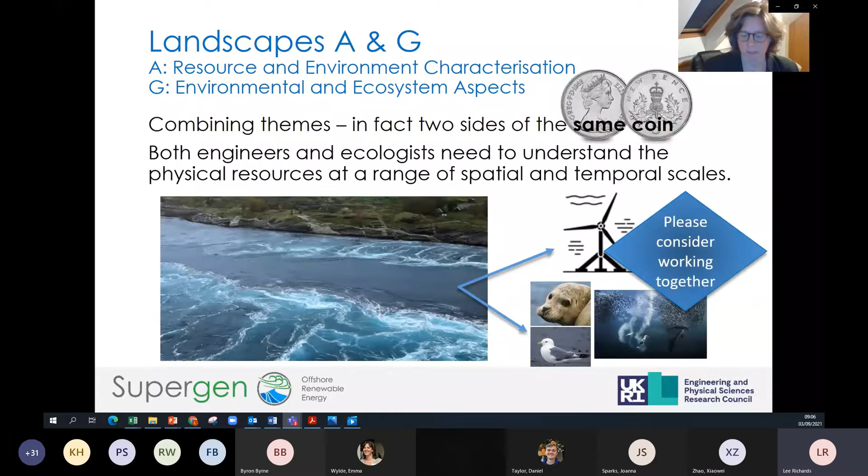What we're doing in our core work within Supergen is looking at the fine scale to the large scale physical and ecosystem aspects. This work goes throughout work packages 1 to 5.

An example of some of the information we've collected and are using is 3D hydrodynamic models - you can see one running in the background in this location - but also ADCP and acoustic fish school collection from the MeyGen tidal site that we're using. That's at the fine scale.

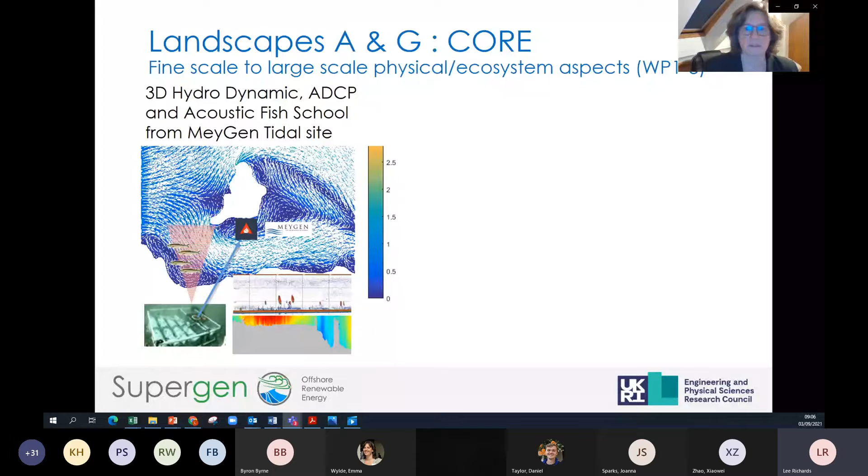At the large scale, we're looking at whole information on UK waters for offshore wind. This is an image of all of the Round 4 sites in which offshore wind will be placed. So there's a lot of habitat there to understand and look at - what are the best locations, and within micrositing for pylons and anchors, and of course the use of cables.

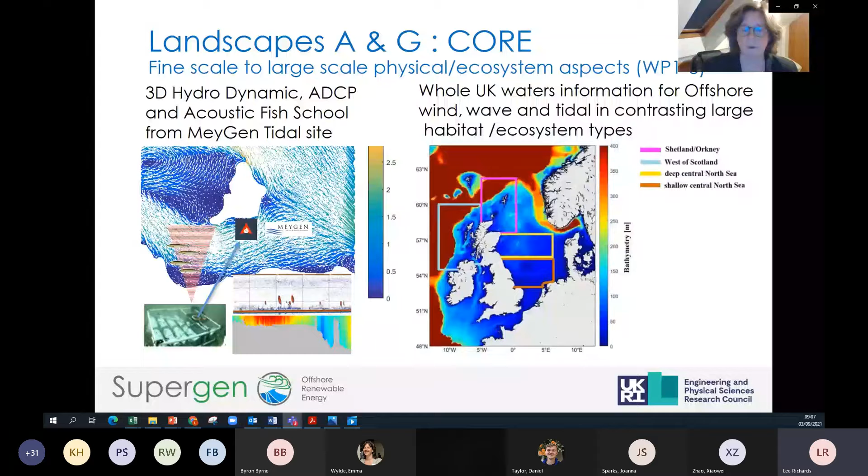We've also looked at these habitats in terms of wave and tidal energy by looking at contrasting habitats and digging into the ecosystem types in these areas. We've done that using 30 years of historical data to start to understand the ecosystem types and also understand what climate change has been doing in these different regions, to better predict which regions might be changing much more drastically than others.

Now what I'm going to do is go through a range of our flexi funds in these landscapes.

I'm going to start with the work looking at current on wave buoys. This has been done by Samuel Draycott using tank simulations and real experiments, where he can compare the measured motion of the amplitudes in these experiments to the predictions from a numerical model that includes currents. This is providing a new framework for predicting current and directional spectra from buoy motions.

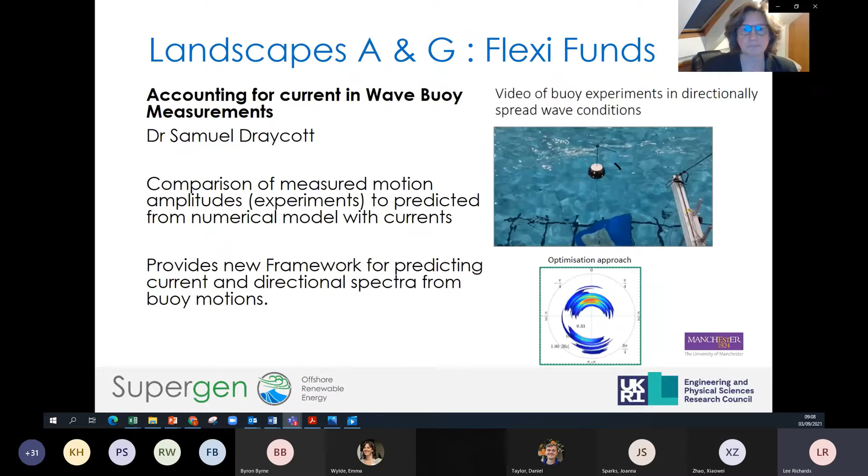Next, I'm going to talk about the V-Scores project. This is run by Benjamin Williamson, using drones as a very cost-effective, low-risk, rapid measurement technique. What you can do with this is use the images you can collect very rapidly from the drones to validate surface currents and use it as a mapping tool.

Drones can be compared to data from ADCPs, ADVs, and drifters, but done much more rapidly and much more inexpensively. Also, you can translate that information from the surface you see to predict what's going on through the water column. This sort of information can be used in the environmental aspects as well, to predict things like seabirds and mammal movement in these areas.

Another one called Venti, run by Marco Placidi, is looking at the fact that the atmosphere is often in non-neutral thermal conditions. As you go up through the atmosphere, the wind resource is significantly different and it's really affected by this, but it's often neglected in many models. So they are using the meteorological wind tunnel, producing these outcomes of non-neutral winds, and putting that back in to study their effect on wind farm performances.

Now I'm going to switch to some ECR projects, a dual one run by James Waggitt and Shaun Fraser. This uses unique ways of capturing data called BinoCam, which takes pictures of diving seabirds and looks at the foraging behavior of animals above the surface, while at the same time using a whole bunch of modified fish traps across the sites to look at the types of animals or fish coming in and out, and their diversity and size ranges.

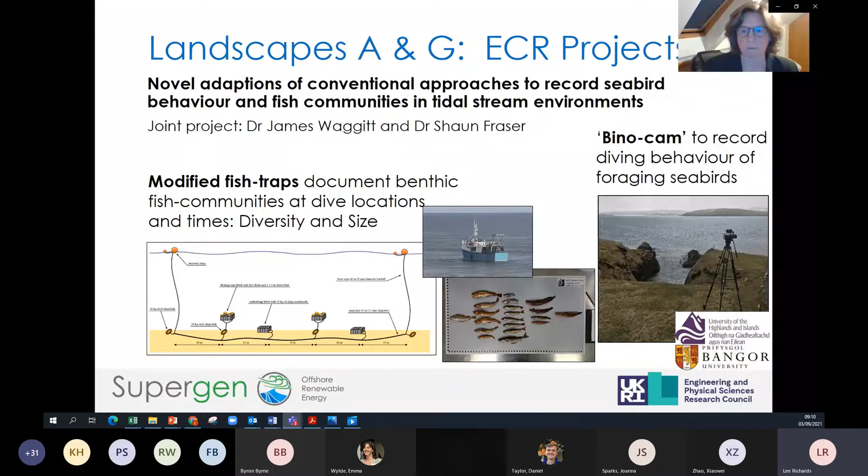A rather new one by Dr. Andrew Want is looking at the dynamic subsea power cables and how they are impacted by marine growth. We really need to understand marine growth better, because it's going to impact the functionality and the vulnerability of these dynamic cables, which are going to be used all through offshore renewable industries. As you can see by the picture, a lot is going to happen when you put things in the water, and this needs much greater understanding than we have at the moment.

Last but certainly not least, I'm going to show you an animation from this work by Pablo Ouro, looking at large eddy simulations performed using the state-of-the-art digital offshore farm simulator, where he's investigating the really complex interactions between wave and tide flow and the turbulent aspects of them.

So I'm hoping you enjoyed that rather quick romp through some of the projects. There's many more to go look at, so please have a look on our website for these different projects and also about the core work that we're doing. You can also look and see if your research should be up on this research landscape, and please submit it. Hopefully that was enjoyable, and we look to see you at our website soon.

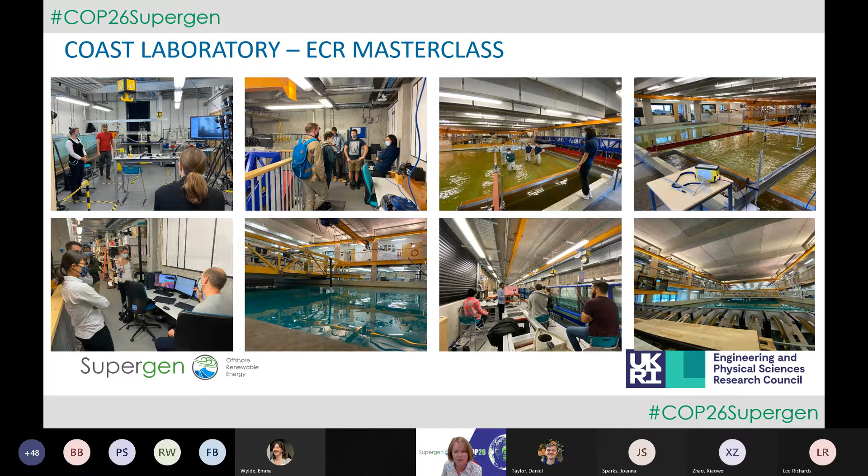That was very exciting. We also, at the moment as I speak, have a host of early career researchers here at the University of Plymouth active in a masterclass to teach them about hydrodynamics and physical modelling in the Coast Laboratory. They've just recently had a companion masterclass on computational fluid dynamics delivered through the University of Oxford.

So supporting those. And Beth mentioned our research landscape. On our website, you could come and visit our research landscape, and through this interactive web tool that I'm just demonstrating here, you can see we try to put together all of the information in a summary form, and you're going to hear about the detail of this information today.

You can see we've got 10 high-level research themes that we've identified in discussion and consultation with industry and academia across the whole of the sector. Within each of those top-level themes, we have a number of research challenges. Those appear on the research landscape. If you click on the theme, you can click across and get further information and detail on each of those. We're going to hear research presentations around each of these different themes this morning.

Following what Beth just said, we're inviting people, if you have research in these areas and they're not included there, please contribute your research information onto our website. So that's me, I'll stop presenting, and I'd like to hand over to our next speaker now, Professor Richard Willden, who's going to talk to us about our research theme B, fluid structure seabed interaction. Thanks very much, Richard, and I'll hand over to you.

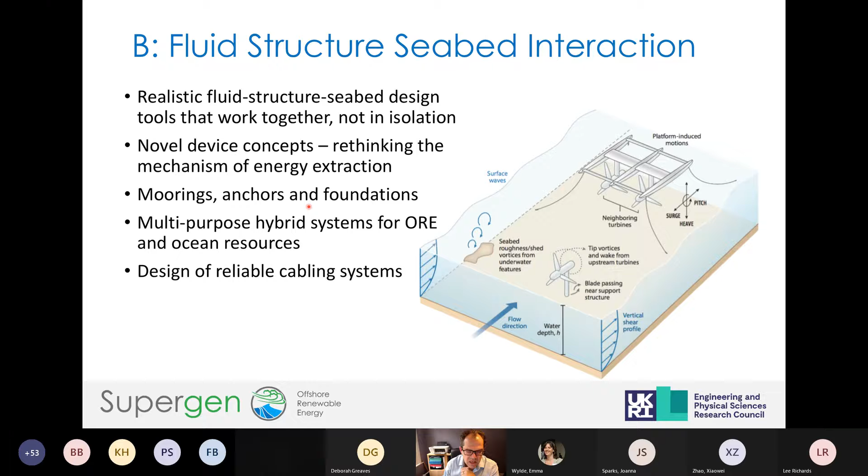So this is some of the work, and Beth related to some of this just now, about multi-scale modelling. Really, the essence of this is that single devices, or the environment past a single device, is not the same as the environment past multiple devices.

What we're trying to do is understand how, when we take particular site conditions - here this is going to be some velocity shear and some turbulence - we can use those site conditions to understand what the flow, the performance, the fatigue life, and the effect on the environment is through a farm of devices. We take those site conditions and try to synthesize some inflow conditions for large numerical models, here some sort of turbulence field and some kind of wave field.

We then put those things through high resolution numerical simulations - you saw a lovely video of one of those. We can then develop whole farm models and analyses for what goes on, and we can develop models for the fatigue decay, the fatigue life of those systems, and also what happens to the flow field and the turbulence, and how that then links through to the ecology, and how that affects the response of different species, and how those shoal patterns might move around in response to what's going on, and how the farm might be operated and the conditions it might face.

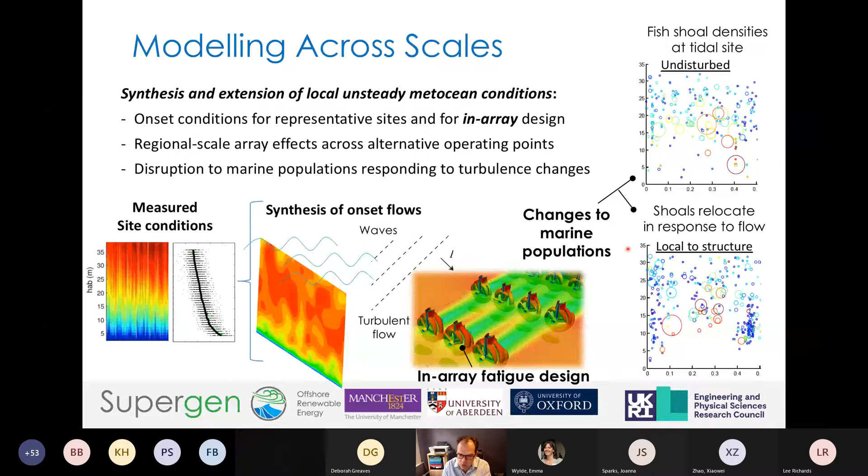So this is the idea. We're trying to take lots of different systems and put them together to give ourselves larger models that take you all the way from the site condition to what happens in an engineering and ecological sense.

Another area - this is moving above water into the more mature wind area. Although wind turbines are large and there are lots of them installed producing huge amounts of power, making a great contribution, we still have a very limited or poor understanding of the energy yield and the fatigue damage that some of these devices undergo when operating in large farms of devices.

The forces on the turbine go with flow speed squared. The power delivery goes with flow speed cubed. So the engineering analysis is very sensitive to getting this right. And what's happened is, although farm models exist, they've been developed for actually quite small farms with low power devices. As farms have got bigger and the devices themselves have got bigger, we need to develop new models that take in new types of interactions between the turbines.

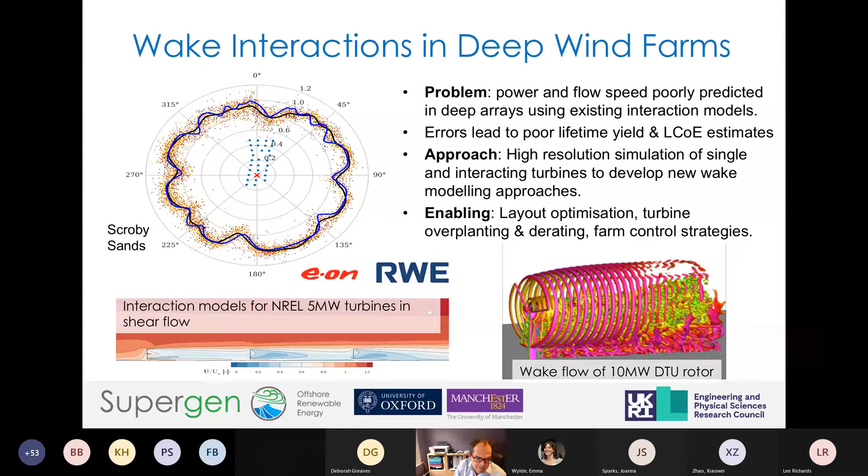Although those areas all relate to multi-devices, even at the basic level of a single device, we still have very challenging problems in terms of predicting the loads when individual devices are put in very complex flow environments.

So one of the things we're doing through Supergen is running a community leadership engagement project where we're bringing academic and industrial partners together to try to actually improve engineering models for individual devices.

So what we're doing is some very high fidelity experiments in a very controlled environment of an underwater turbine in waves and turbulent flows. This is a highly instrumented device, and we're then going to ask our community to try and predict the best they can what the loads are on these devices, and through that mechanism - and then feeding back what the actual data is - we can try to improve engineering models and put error bands around existing models.

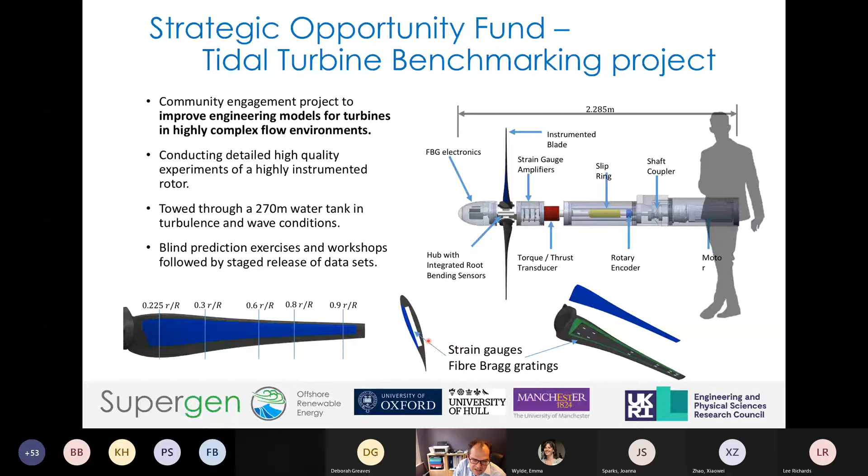We've got highly instrumented blades here, with measurements coming out all the way along the length of the blades. You can see cutouts in here, and then we've got fiber Bragg gratings and strain gauges down the length of the blades to try and get some loading estimates. This is a very live project.

We're actually launching the first workshop associated with this exercise next week, which we're inviting all our participants together for, to start trying to simulate and understand the loads experienced by this turbine. This is an ongoing project that will be running for the next 12-18 months.

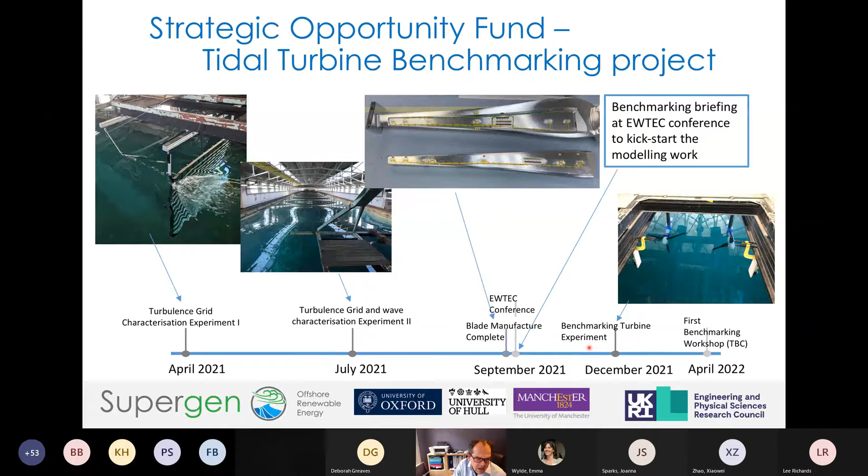Also, something about the novel devices - the environment in which underwater devices exist is quite different from the air environment for wind devices. One of the things we are trying to do is look at how we can use the constraints imposed by the seabed and sea surface to actually benefit the performance of devices.

It's quite a nice story - you sort of loop around from theoretical modeling through experiments into LCOE type analysis. By taking some very fundamental approaches combined with simulation, we can actually develop models that show we can extract more energy by using constraint effects between turbines.

We can then go and design these turbines numerically, and these new turbines are tested in the FloWave tank up at Edinburgh. We can see that we get performance uplifts from trying to operate turbines in close proximity to each other, and working with industrial partners, we try to work out what difference this makes to LCOE.

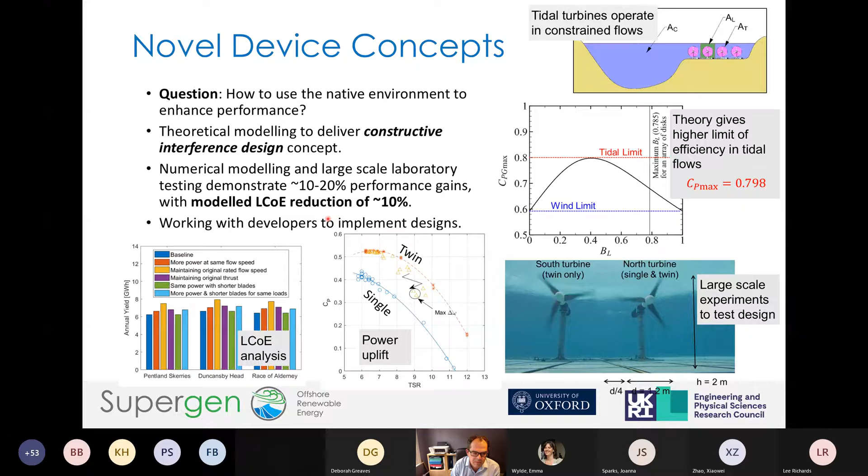So at the moment, we're looking at sort of a 10% reduction in LCOE by trying to use novel devices with environmental constraints to try and help us improve performance.

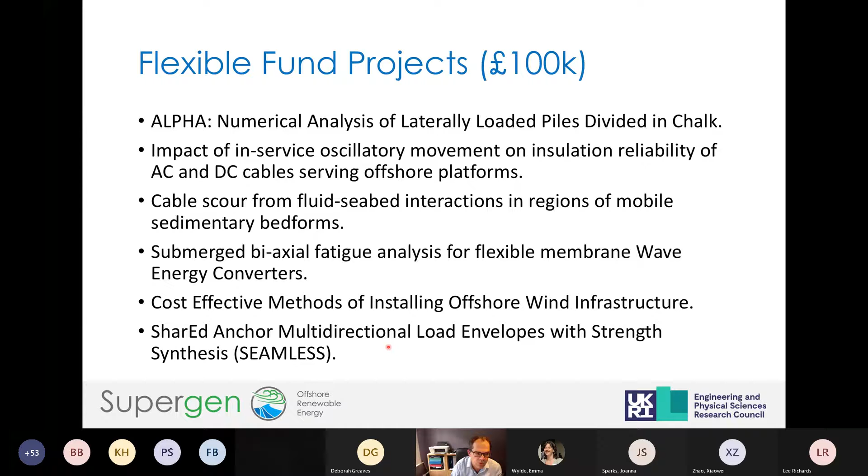So thank you for your attention, and I will hand over to the next speaker.

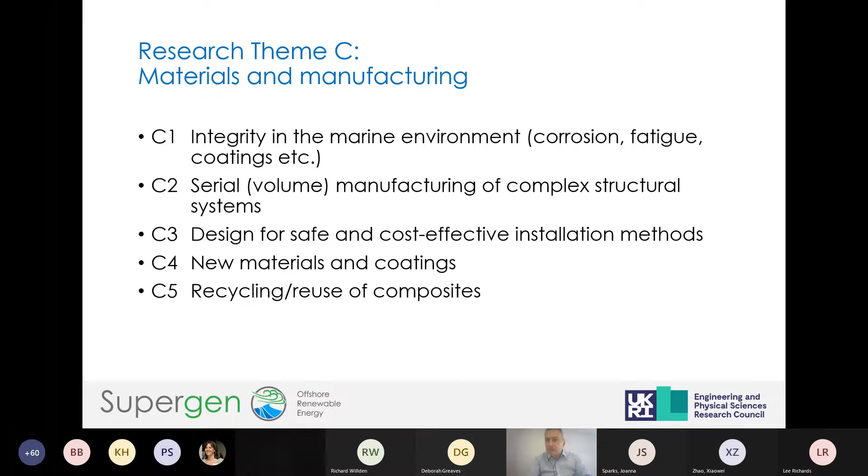I'll just refer to the offshore wind sector deal, where the industry strategy was set out in collaboration between the UK government and devolved governments, along with the wider stakeholder community, agreeing a roadmap towards 2030 - currently 40 gigawatts of offshore wind by 2030. Given that we have just over 10 today, and it's taken us the last 20 years to design, build, deploy and operate these 10 gigawatts, we've got to quadruple what we have in just under 9 years, which is quite a challenge.

60% local content is hugely important. So whereas we can slap ourselves on the back in the UK for being currently, and probably not for long because China is fast approaching, the largest operator of offshore wind in the world, the majority of that hardware is not manufactured in the UK. There's a huge opportunity as we quadruple the amount of offshore wind, and as we develop the marine renewable energy industry, to focus more on what can be done.

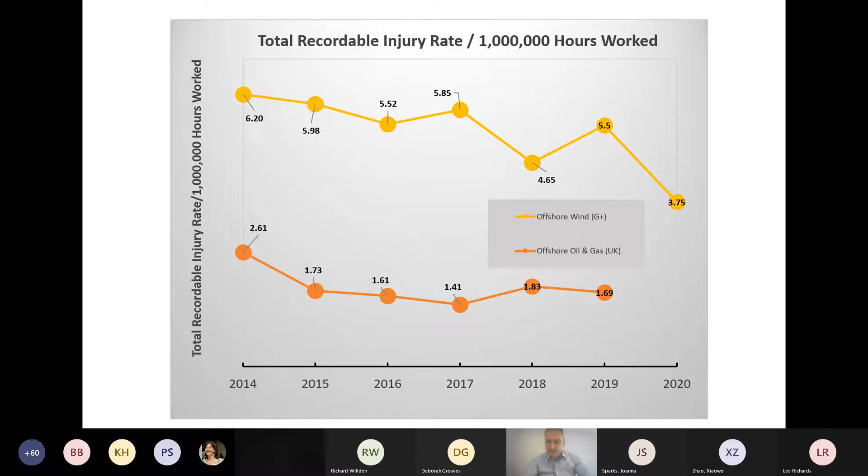The other aspect is the circular economy - we don't want to see this continuing into the future. Glass fiber is notoriously difficult to recycle, and I'm delighted to report that Supergen ORE has contributed significantly. I'll mention a couple of the projects associated with this, so that we can reuse the huge amounts of glass fiber used in both onshore and offshore wind, and also for marine renewable energy devices. Here is a list under the materials and manufacturing thematic challenge.

The first one is recycling composite wind turbine blades for high performance composite manufacturing. It's not just a challenge of recycling, but what Dr. Liu Yang is doing at Strathclyde is developing a hugely efficient way of ensuring these can be reused also for structural applications. Very often when you recycle, there's a certain amount of degradation associated with the structural properties of the material. By being able to do this in a clever way, you can potentially retrieve almost 85% of the structural capacity that the virgin or parent material might have had.

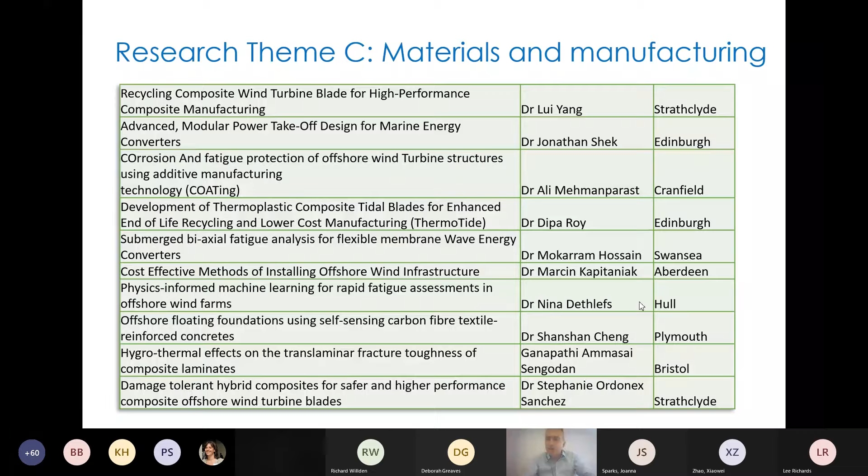This is another exciting development from a Flex Fund project funded with colleagues at Cranfield University, using additive manufacturing. For those of you who aren't so close to this area, this is like 3D printing, potentially for the repair of offshore wind structures.

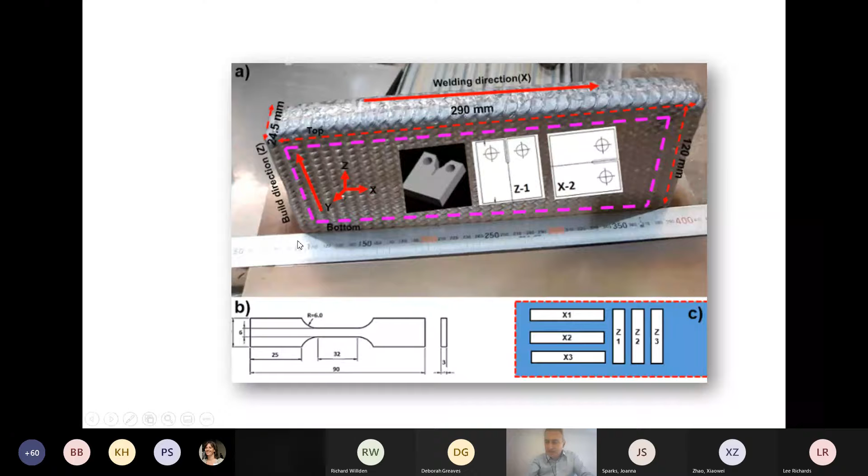So if we can go out there and use our autonomous and remotely deployed inspection methods, and we find defects, we can simply send out a 3D printing type device and repair that component or structure in situ, which helps us extend the lifetime and usable value of that high value asset.

With respect to research theme F, which is operations, management, maintenance and safety, very much a continuation and related aspect to what I was just discussing, the Flex Fund project we funded here was led out of York University: autonomous biomimetic robot fish for offshore wind farm inspection.

We also have the satellite climate observation for offshore renewable energy cost reduction, led out of the University of Edinburgh with Strathclyde and others contributing, and also a couple of super projects from Exeter.

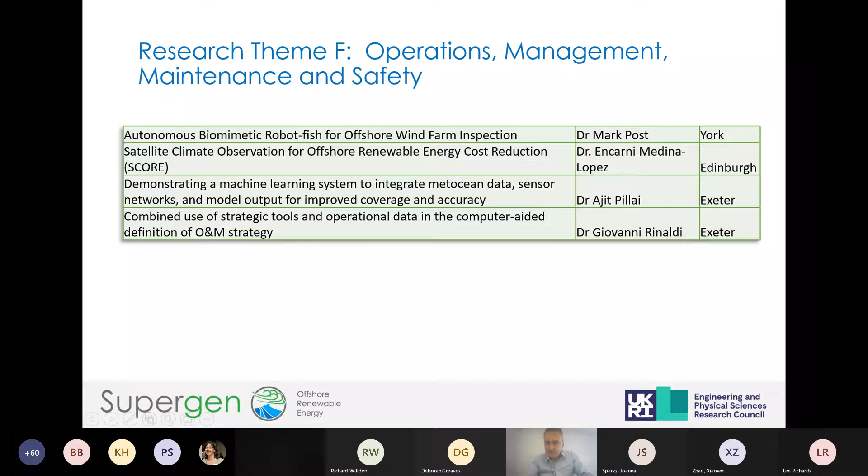Just very quickly, this is the satellite data, and this is really to look at both short-term, medium-term and longer-term predictions of the local environmental conditions that our marine renewable energy and offshore wind devices are likely to experience.

As Richard said, there's a great deal of uncertainty associated with knowing precisely what the local conditions are, and the more knowledge we can get, the better we can prepare and design, and also ensure that our control systems are ready for the environmental and weather conditions we're likely to experience.

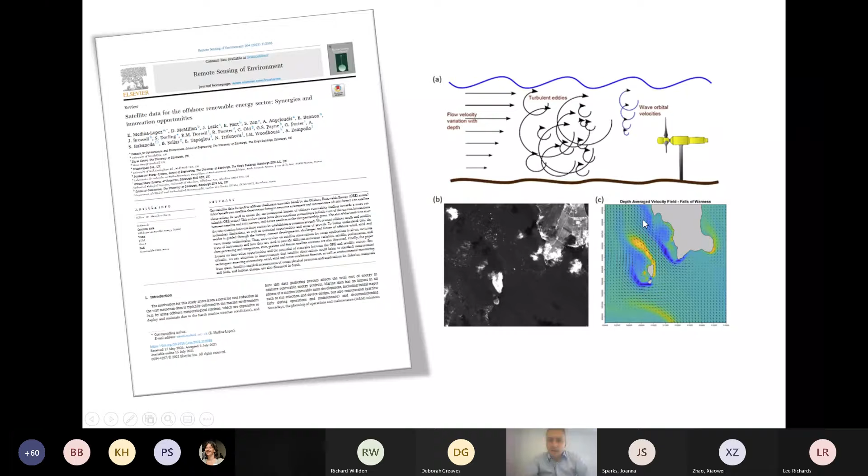And then lastly, but certainly not least, this is the project on the robo-fish, the bio-inspired autonomous underwater vehicle. Again, you can see the motivation for all of this: if we can replace humans, if we can replace putting people out into this hostile offshore environment, that will in turn mean this is a safer, more responsible sector.

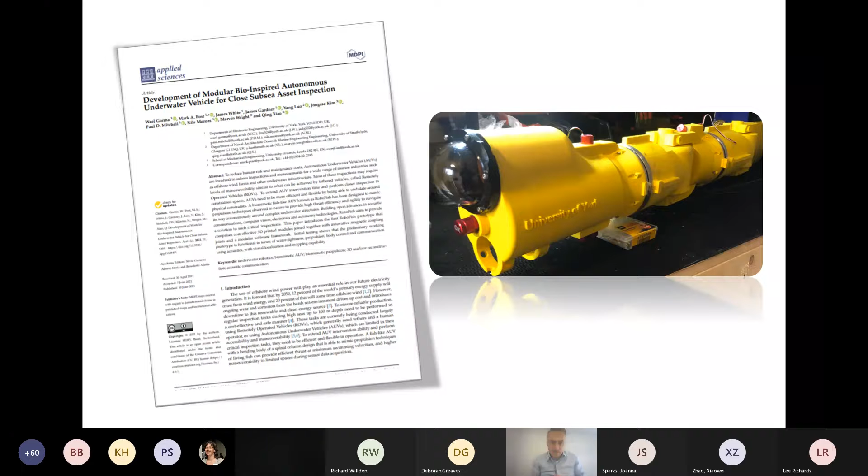This also fits into the macroeconomics, because when people complain about removing people and say they'll lose jobs, my view is very much that we should not be training technicians to repair offshore wind and marine renewable energy devices. We should be training people to repair the robots that will repair the offshore wind and marine renewable energy devices.

So I think that is it. Thank you very much.

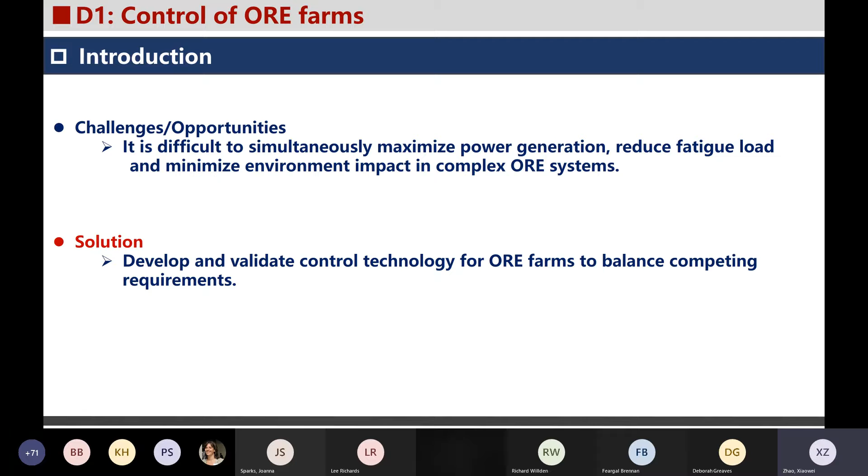The first area is control of ORE farms, which is to develop and validate control technology for ORE farms to balance competing requirements such as maximizing power generation, reducing fatigue load, and minimizing environmental impact. Next, I'm going to give several examples in this area at both farm level and the turbine level.

In practice, it is very difficult to derive a control design model with reasonable accuracy and dimension for farm-level control design. So existing model-based wind farm control methods commonly lack adaptability and robustness to modeling error and stochastic environment conditions. In this project, we designed a deep reinforcement learning based control algorithm to address these challenges.

The algorithm allows us to employ only the available data measured at the turbine rotor, including the wind speed and the power output, to learn the black box information. Our method is totally model-free, which does not rely on any analytical models. It has a strong adaptability to the modeling error and robustness to stochastic environment.

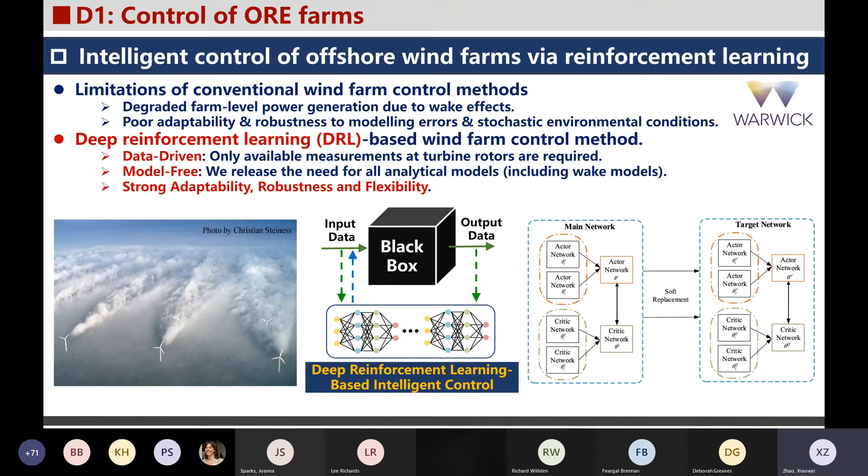So we tested our algorithm with different dynamic wind farm simulations as shown here. The results indicate over 30% of the farm level power generation increase compared to the conventional greedy strategy, and our method's performance surpassed other advanced control methods such as nonlinear MPC and another very popular reinforcement learning algorithm, DDPG.

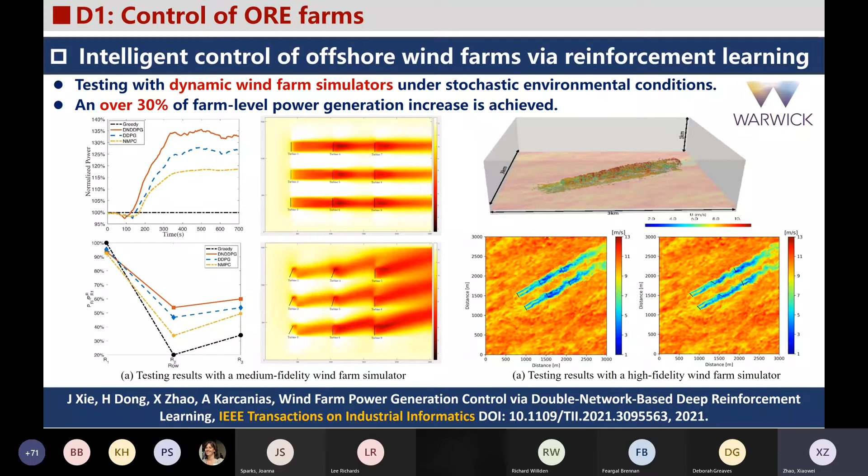Now let's look at some results at the turbine level. This slide is about vibration and power regulation control of a floating wind turbine. The motion of the offshore wind turbine platform can cause big issues to the turbine structure and power generation. Thus, its vibration reduction is very important.

The traditional pitch control is effective for vibration reduction at the expense of interfering with power generation. So in this project, we developed an LPV pitch controller for the floating wind turbine, which can tackle the power regulation and the platform vibration in a synthetic manner.

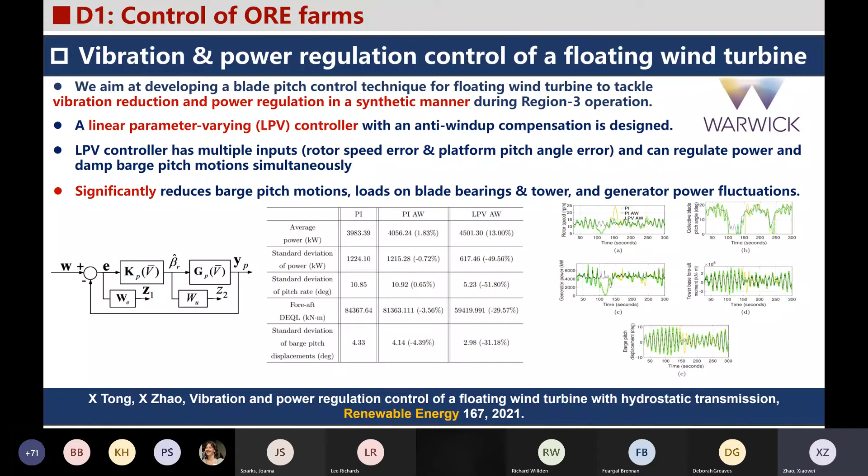So we employed tuned mass dampers to mitigate the vibration of this type of platform, which achieved 33% vibration reduction with the tuned mass damper weighing around 4% of the whole platform.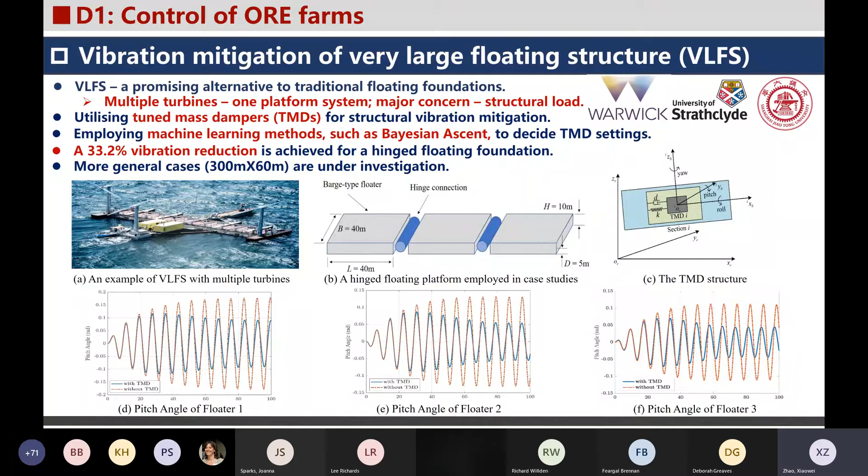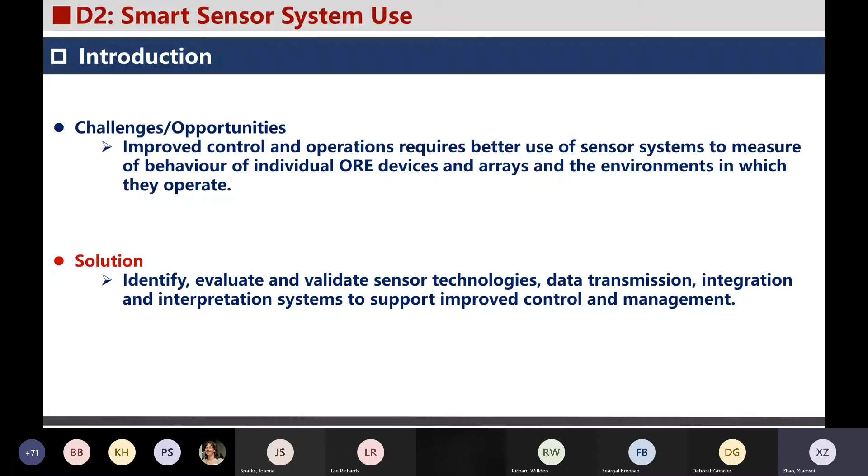The second area within CMD is the smart sensor system, which is to identify, evaluate, and validate sensor technology, data transmission, integration, and interpretation systems to support improved control and management.

An ongoing work within the hub is looking at sensors distributed across ORE structures, particularly wind and tidal turbine blades, for a number of applications such as defect detection, manufacturing process monitoring, and control. This work is led by Professor James Gilbert at the University of Hull.

The example shows a 1.6 meter tidal turbine blade with 24 fiber optic strain sensors. It was designed and manufactured by Oxford University, as shown by Richard just now. Initial results show that it is able to monitor different loading conditions.

Another ongoing work in this area is a flexible fund project led by Professor James Windmill from University of Strathclyde. This project designs and manufactures a 3D printed piezoelectric sensor and explores its feasibility in providing partial discharge detection capacity for large-scale floating arrays.

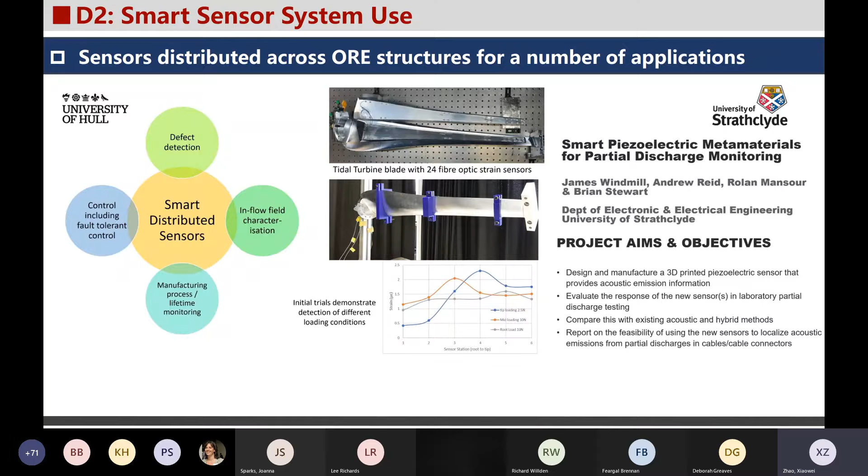The next example is about how to use the sensor data. With measured data and physics-informed deep learning, we can reconstruct the whole flow field in front of a wind turbine. I'll show you two videos.

So this is ground truth, and this is the predicted flow field. These two videos show a comparison between the ground truth and the reconstructed flow field. You can see they agree very well.

The traditional machine learning method can only predict the wind velocity where there are measurements, so these dots are placed where there are measurements. But our method can predict the wind velocity in the whole flow field, anywhere in the whole flow field, because our machine learning method is physics-based.

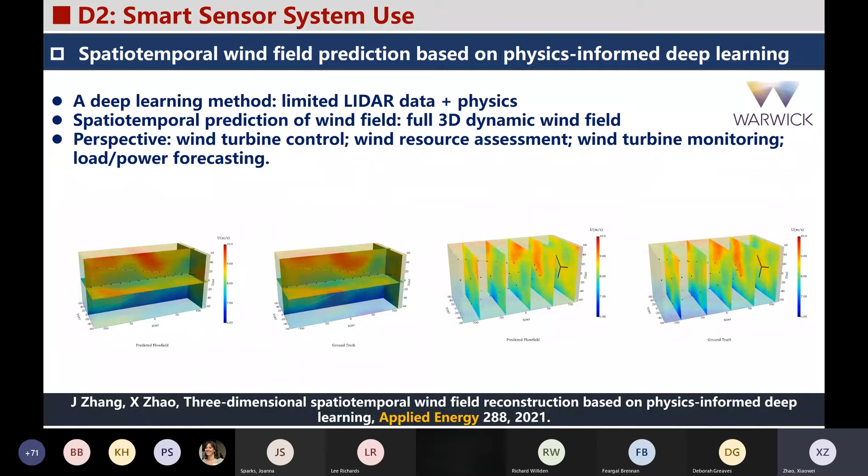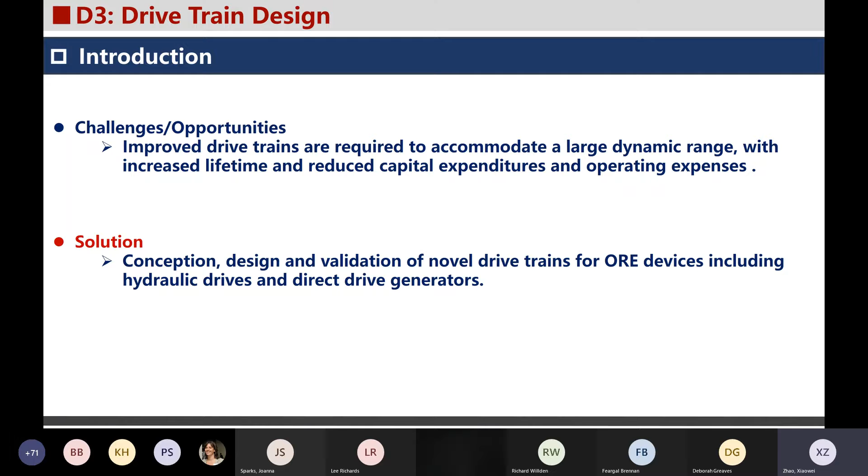The third area within CMD is about the drivetrain design, which is about the conception, design, and validation of novel drivetrains for ORE devices, including hydraulic drives and direct drive generators.

An example regarding the hydraulic drivetrain is that we studied the power generation control and grid integration of the hydrostatic transmission wind and tidal turbines.

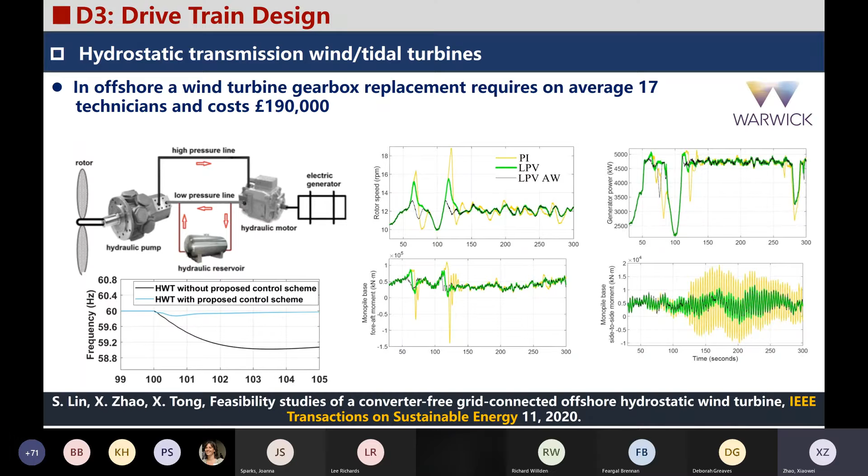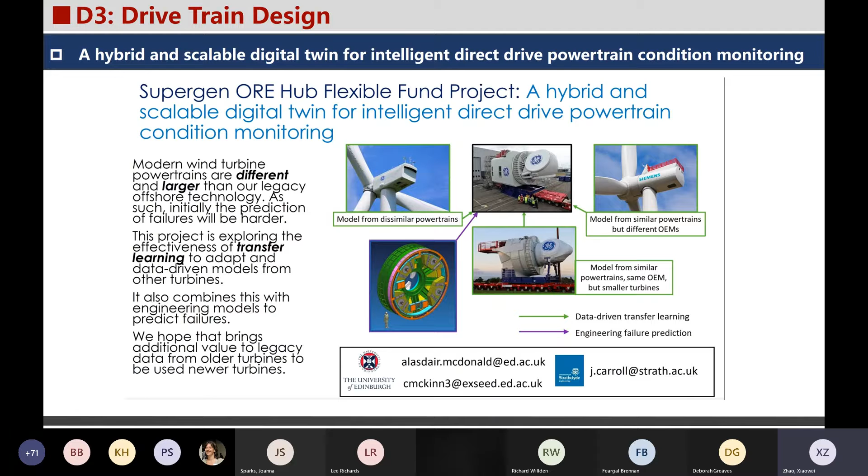An example regarding the direct drive generator is a flexible fund project led by Professor Alasdair McDonald from University of Edinburgh. This project is developing a digital twin technology which combines transfer learning and physical modeling for direct drive powertrain condition monitoring.

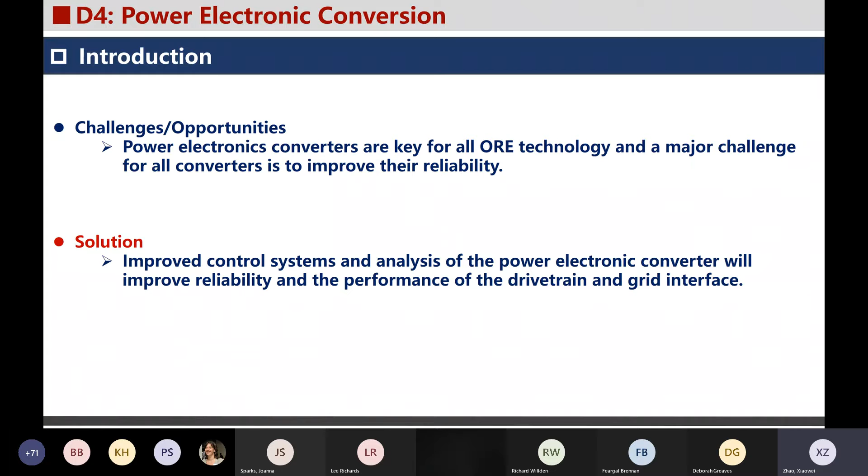The final area within CMD is power electronic conversion, which focuses on improving the power electronic converter in order to improve the system reliability and performance.

One example in this area is a flexible fund project led by Professor Li Ran from University of Warwick. This project is to develop a technology to provide transient overload capacity to power semiconductors in the converter ORE system. This has been demonstrated by integrating the liquid metal phase change material into the package of the power module.

The power module can now be overloaded to 240% of the rated current for at least 3 seconds. This fully satisfies the requirement of grid support during a short circuit fault.

Simulation shows that the fatigue stress in the pitch mechanism of offshore wind turbines can be reduced by around 10% by using a simple on-off control mode of the overload capacity to allow cooling. The ongoing work to combine this capacity with pitch control itself could show more effectiveness.

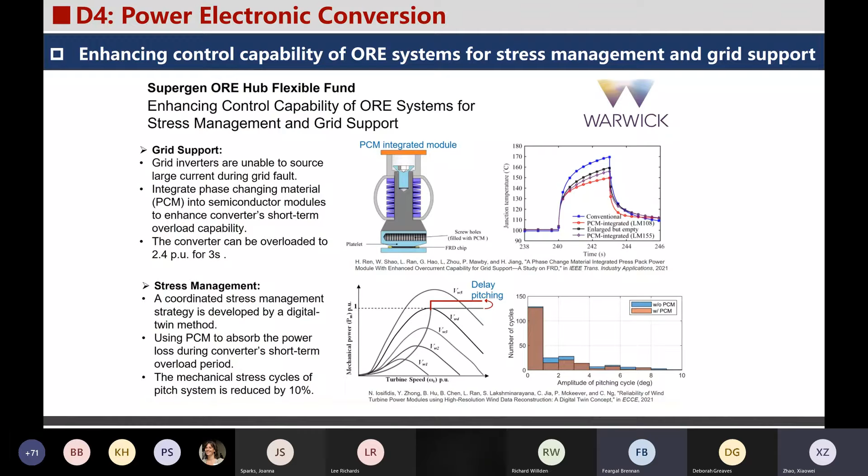I believe Professor Li Ran will show this new result in the next assembly. Thank you very much for your attention.

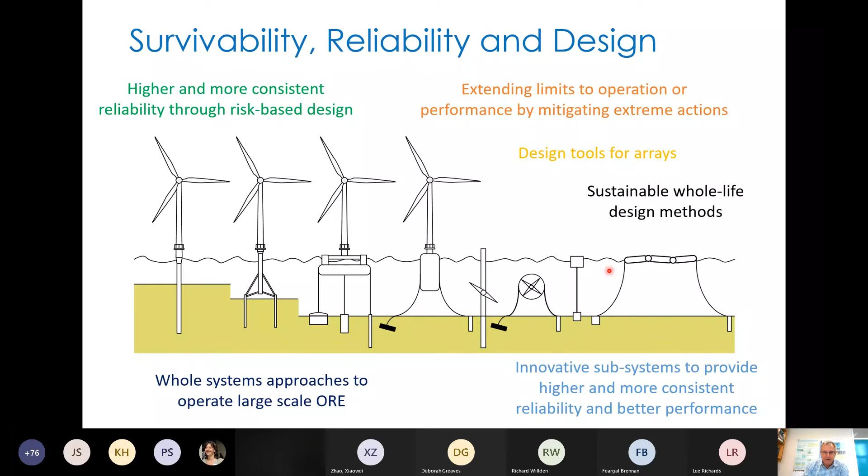I've talked a little bit about extremes. We've got to design for extreme, we've got to be able to predict the extreme. That requires a probabilistic approach. We might also need to worry about fatigue problems, because these devices are exposed to many hundreds of thousands, millions of cycles from the waves and from the wind. So we need to understand this very harsh environment.

I'm going to talk a little bit about some of the core research and some of the flex funds, not in a huge amount of detail - that can be obtained from the website. I'm going to focus here on work at Plymouth, which is looking at the design of 3 different devices, shown here.

The first is a sort of point absorber, where we have a floating type structure at the top connected to the ground, and the relative motion between the two parts leads to the energy generation. We've got some sort of hinged device here, looking from the top, where the relative motion of the two parts leads to the energy generation. And then we've got the floating wind device.

The idea is to look at these different devices. They've been selected in collaboration with industry and other partners. What we're trying to do is assess performance under extreme conditions, particularly extreme waves, and understand what are the loads in the mooring lines or in this connection, so that we can design the system to survive for 25 or 30 years.

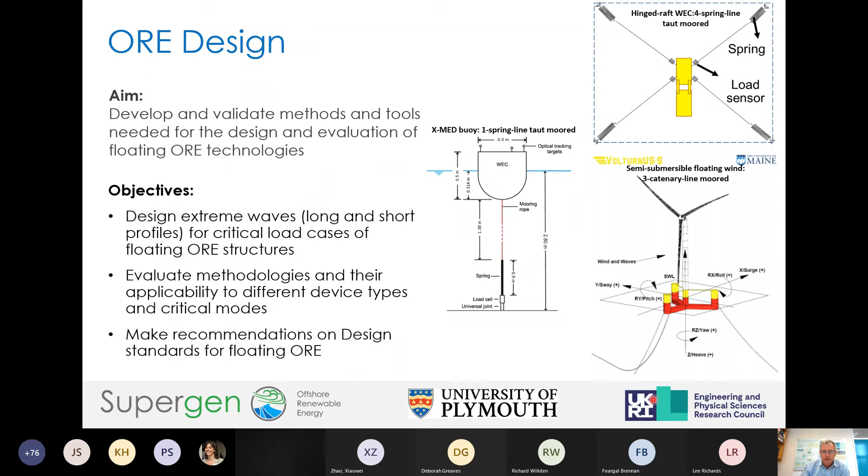Before we can do that, we obviously need to understand a bit more about the site. Beth talked about the environmental conditions - we need to translate that into some sort of engineering model of the site. In particular, we might want to know what are the wave heights at that site, and what is the period between, for example, the crest of the waves or the trough. Then we might want to know that over 30, 40 years, so we can design the system appropriately.

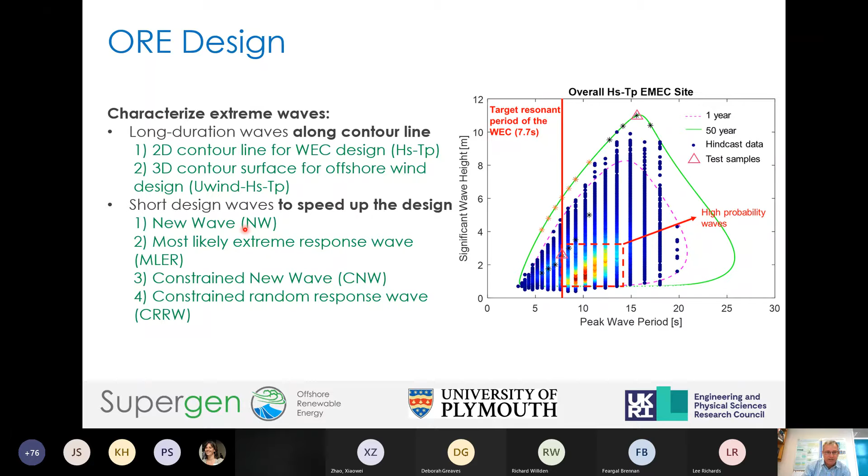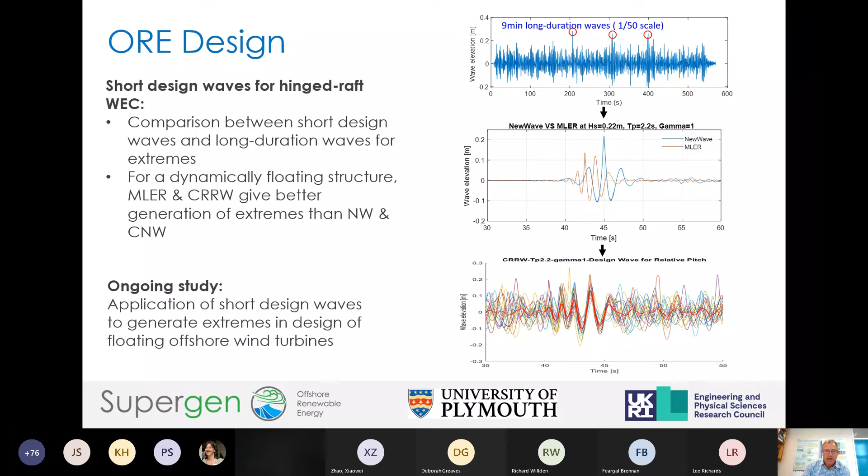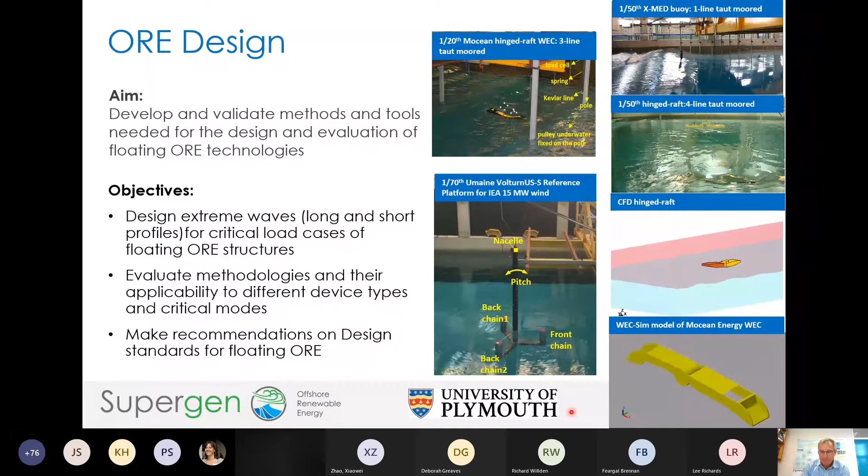From these types of experiments and simulations, we get information on mooring loads. Colleagues at Southampton are doing a lot of work developing new theoretical models for anchoring systems, where the anchor is embedded in the ground. My colleagues have developed a new idea for improved understanding of how these anchors carry load, leading to increased capacity compared to previous understanding.

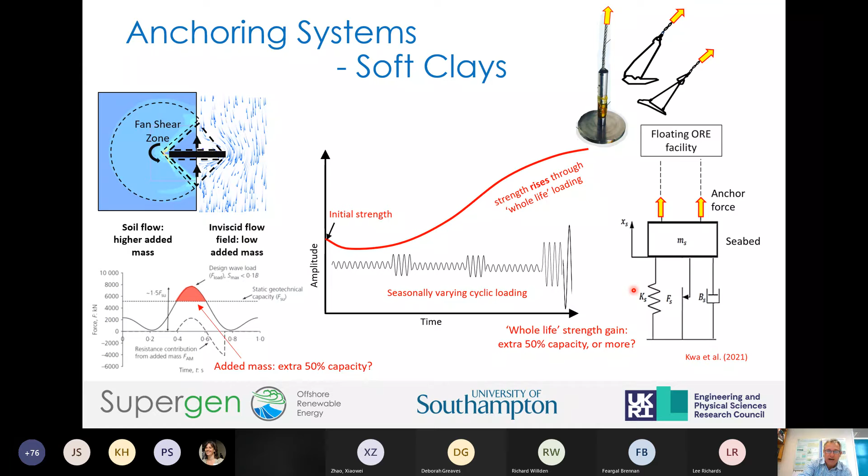Taking account of the whole life of loading of the system, we can see benefits from the repeated loading that occurs on the foundation, which can actually strengthen the system over time. All of this gets embedded into simple mechanical-type systems that allow us to develop a simple analytical model, which can be built into a numerical or simplified numerical calculation.

Other work, this time from the University of Oxford working with Imperial College London, involves large-scale field testing carried out over a number of years. Through funds from the ORE Hub, we've extended that program of work. This type of work costs a lot of money, millions of pounds, and we've been able to extend it to explore cyclic loading on the foundation.

This shows some examples: these are the piled foundations being installed, and this is a detail of the experimental work. It's very complicated, involving big forces, up to many tons of load being applied. Here are some cycles being applied to our foundation.

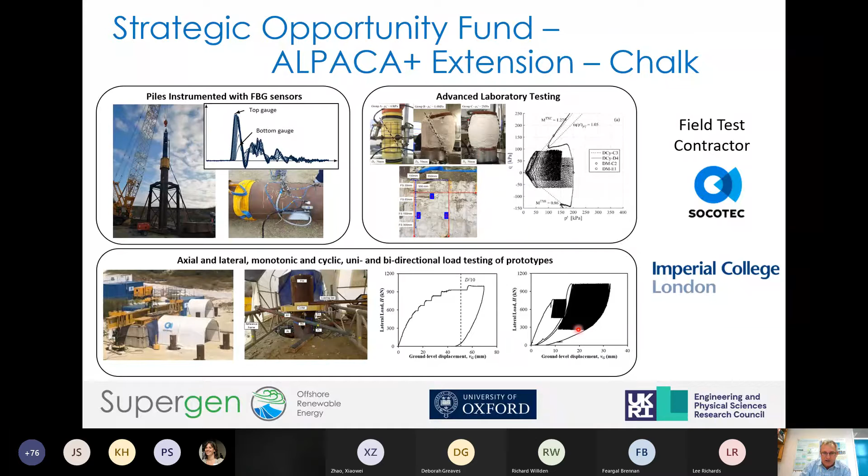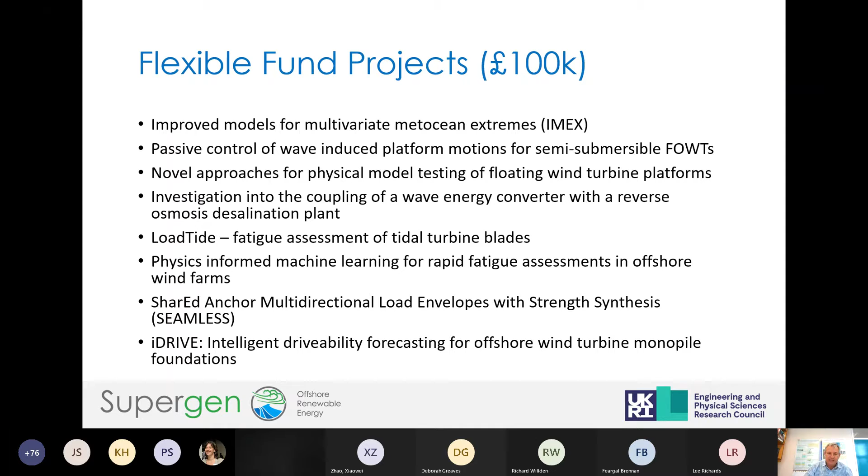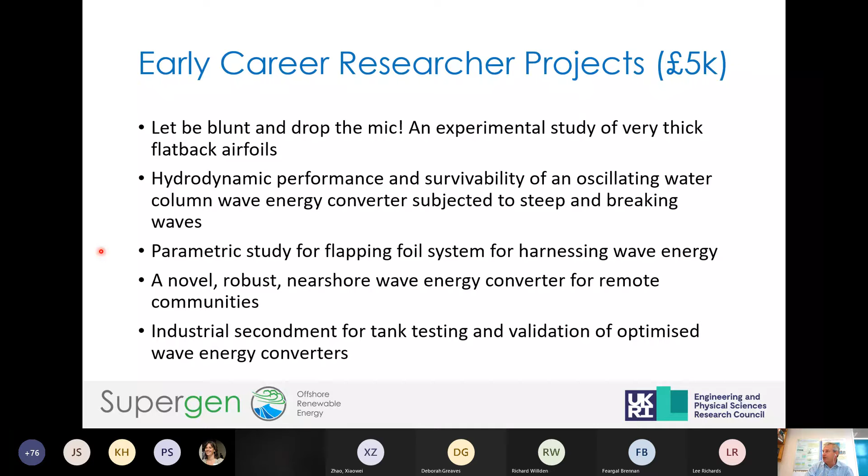I'll finish with the Flexible Fund projects. There's a range of smaller scale projects looking at extremes of load, novel devices, fatigue calculations, foundation design, building on other work, and new techniques for estimating foundation performance during installation. The early career researcher projects look more at novel devices and new ideas for energy generation. So I'll finish there, and thank you very much for listening.